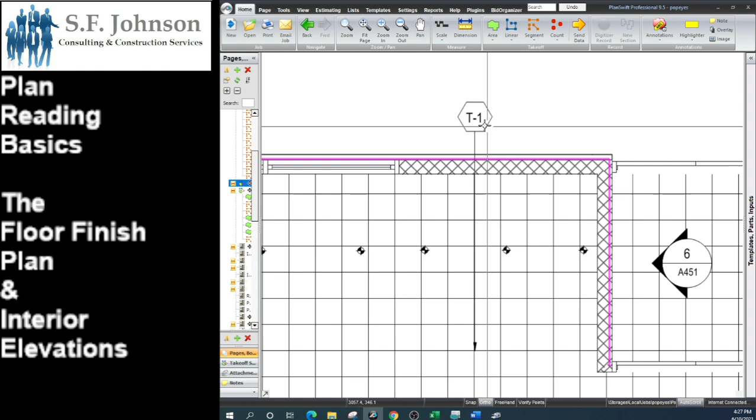So now what we are looking at is the floor finish plan. So it basically tells us all of the finishes on the floor. Okay, and so of course we're going to have finish tags everywhere that show us T-1 pointed here, tells us that's the type of tile that we have on the floor there. T2, even though it's the same design, it's a different type of tile.

Okay, and then we're always going to have a finish schedule, right? So the schedule is just a list of all of the finishes that are within the full project, whether it's tile, paint, wall graphics, as you can see, tile base, even the grout. Of course, they're going to give you everything in great detail for all the finishes for everything that's within the set. And so we're going to know that T1, T2, T3, the type of tile.

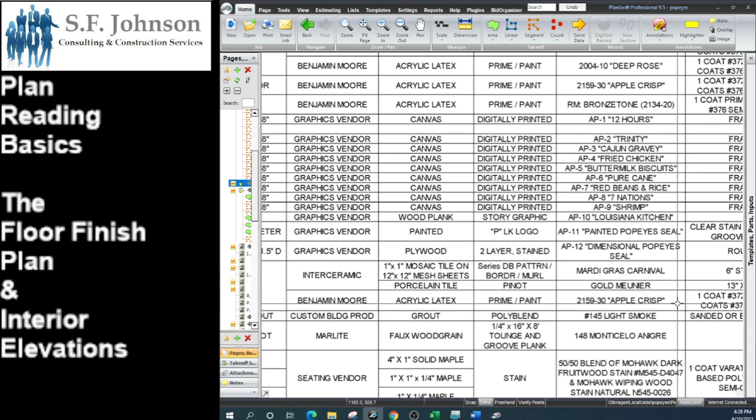Here's T3. It goes on the restroom wall. It's the type of tile. It's the size of it, manufacturer, color, and all that good stuff. So on our floor finish plan, it's going to tell us all of the finishes that are on the floor. So what we just need to do is use an area tool to measure the area of each of the different floor tile types. And then we'll have how many square feet of tile we have to place.

Now, in this particular set, we have the interior elevation markers. And so what the interior elevation markers do is they point you in the direction of the interior wall, or we can have exterior elevation markers, which would be outside the building. It points you to a wall, and if you go to, same concept applies, image number 7 on page A120 is going to show you all the finishes that are on this wall.

Same thing with this one, it's pointed in this direction. And so if you go to image 9 on A120, it's going to show you all of the finishes on this wall, and so on and so on, all throughout the project.

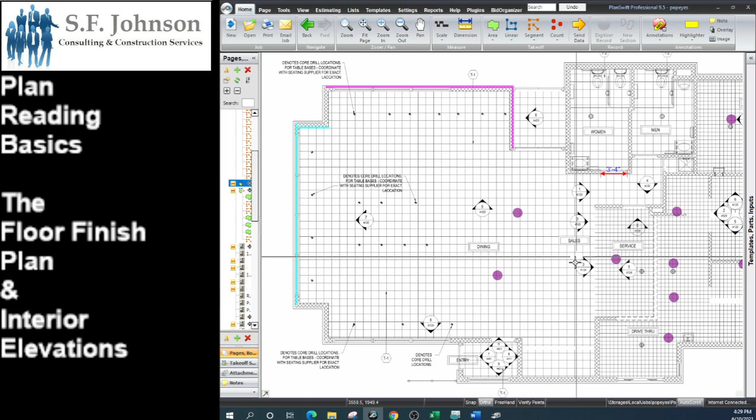So from a floor finish plan, we have the interior elevation markers that are located on the floor plan. And so it points us to the image or the picture and the sheet number where we can find the finishes, or the items that are placed along each of the walls. So we'll just take a couple of looks.

All right, so interior elevation sheets show you the view of the wall as if you are inside now. You're standing inside of the restaurant, and this is that wall, image 7 on page A120, and we would have been pointed here from the floor finish plan.

And so if we look on this wall, this is for all the finishes. So it shows us what is on the wall. So if we're the painter now, even though it shows a television there, we know that we're not painting the TV, right? So we know that this wall is P2. We go back to our finish schedule.

We know the type and color of paint P2 is. And then our only job really here is to be able to accurately measure how many square feet of wall, excluding the window, that I'm going to be painting. And if I'm doing the tile base, or WS1, which is some kind of wall covering, I can use the interior elevation views in order to make all my measurements.

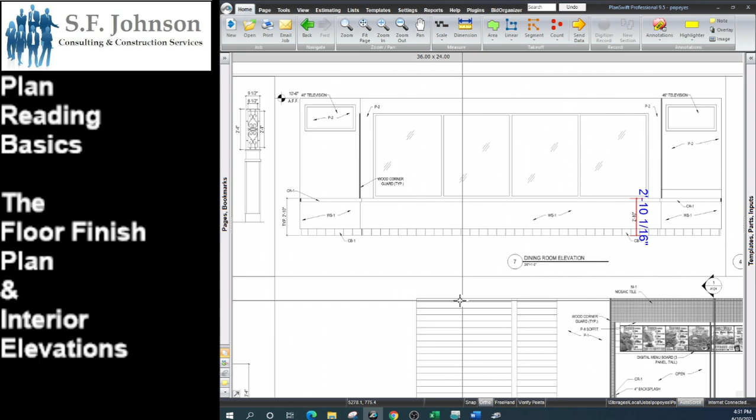Chair rail, I know how many linear feet by using the interior elevation views. And you'll have one of these per wall, of course. So you can get all the detail you need, take all the measurements you need to accurately determine how many linear feet, square feet, or whatever of the finish. So that's just one. And here, just a couple of other ones.

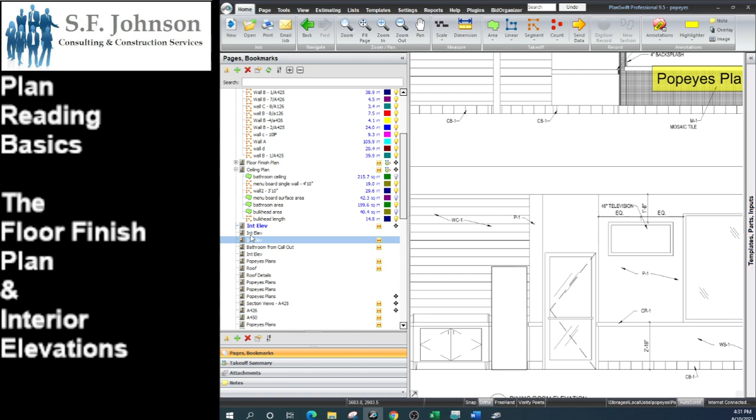So a really good set of construction documents is going to give you a lot of interior elevation views. It's going to show you lighting contactors. So this is the kitchen elevation, and it looks like this is where the electrical panels are going to be. So it's going to show you a visual of what, once they're installed, it's going to look like. And all the equipment, and of course everything is marked its name.

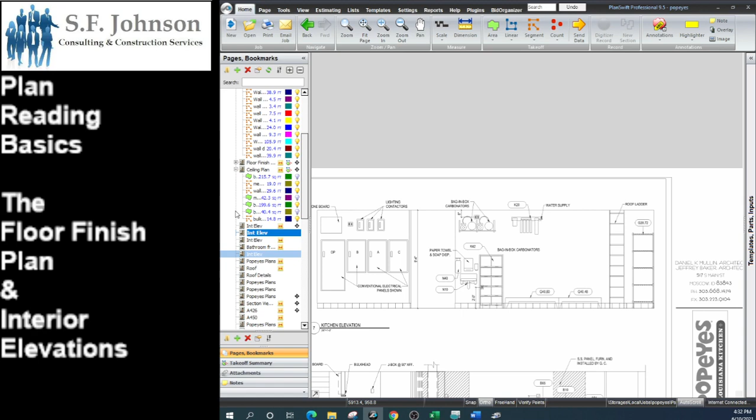So K42 is this, whatever that is. So I know that that goes there, and N40 goes here, and N10 goes there. Okay, so that's what the interior elevations show you, all of the lifelike view as if you're standing in the restaurant.

And let's see, we have just some more interior elevation views. Let's see if we have some exterior elevation views. We thought we marked it, but maybe we did not. Okay. Okay, here's the exterior elevation view. So it's the outside of the building.

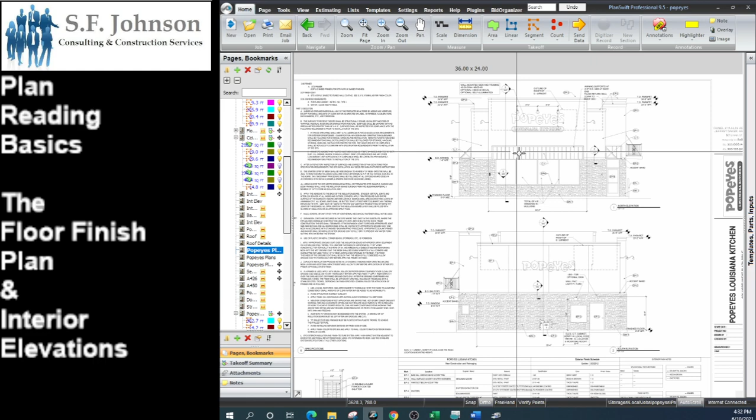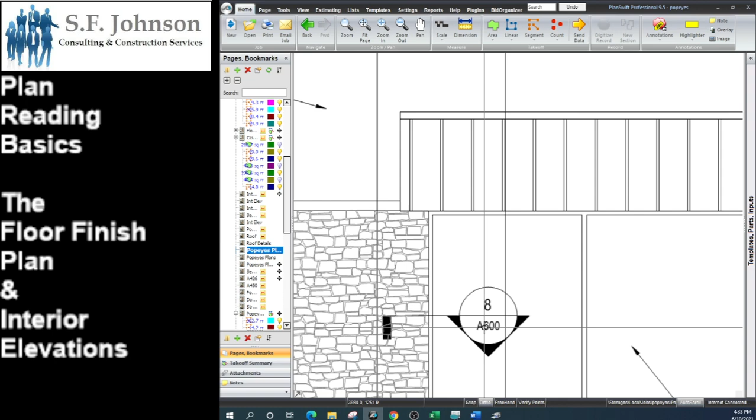So now if I'm the tile person, or if I'm installing the windows, or I'm installing the lighting, I'm going to be able to use this to tell the distance between the lights I have to install, or all of the ornamental items that are here, or if I have to caulk the windows. And here we have a section view, so we go to 8/A600 to determine what they're telling us to do. And it's probably telling us how do we caulk between the tile and the window, something like that.

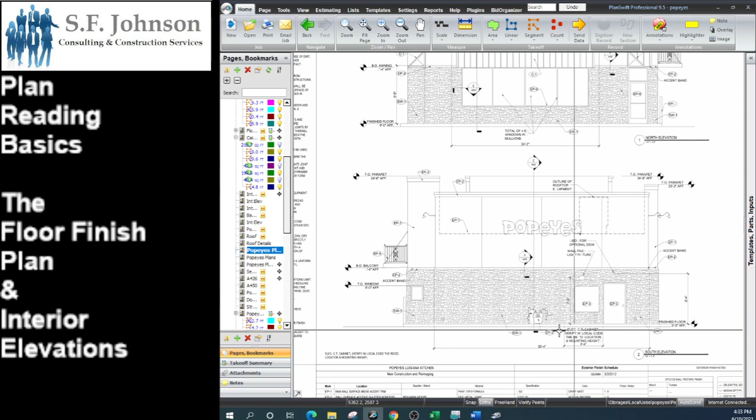So all of the exterior elevation views, and you would get those. Of course, you'd only have four of those because a building only has four sides, unless it's like a hotel and then one of the sides extends or something like that. But so that's how we go from the finish plan to the interior elevation views and the exterior elevation views. And those views are totally intended for all of the finish trades.

So the painter knows how many square feet. They can accurately use those sets of sheets to accurately measure how many square feet of wall they're going to paint, or how many linear feet of chair rail is necessary, or any of the finish trades. That helps them greatly in order to accurately measure, and they don't have to guess. They can go around windows and doors and get a very accurate takeoff or measurement.